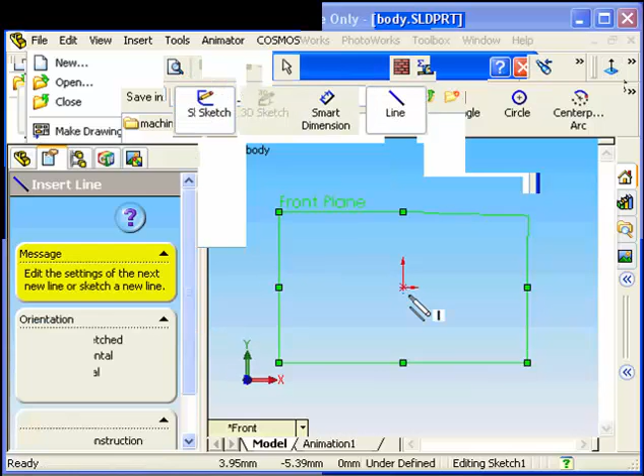Followed by that, we'll select the front plane, look normal to it, and then sketch out the profile of the shape shown on the first page of the notes.

For the 45 degree line, just come in at 45 and snap to it. Then add relations for the two lines of 45 degrees so that they're equal in length. Then add a relation to this line and this line to make them collinear so that they are in line. Hit escape to tick OK.

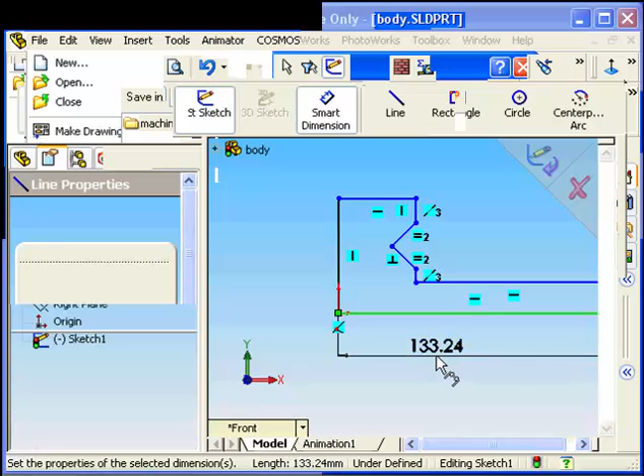Then what we'll do is smart dimension it. Don't worry if it goes out of shape, because when you dimension it, it should all fully come back into shape.

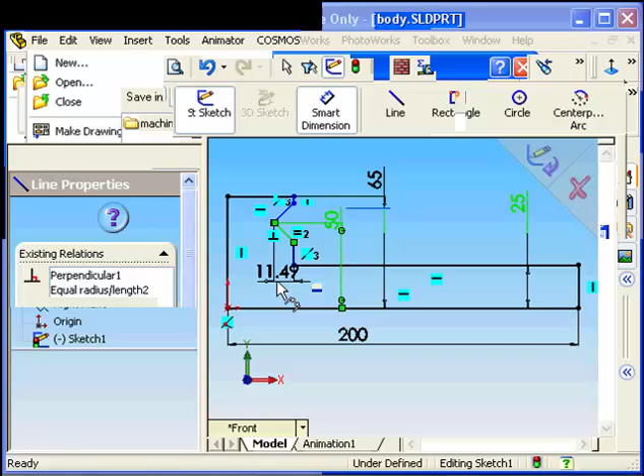If your dimensions are cluttered, you can click and drag to move them. Then Features, Extrude Boss Base, and you extrude it to 110 millimeters in a blind condition.

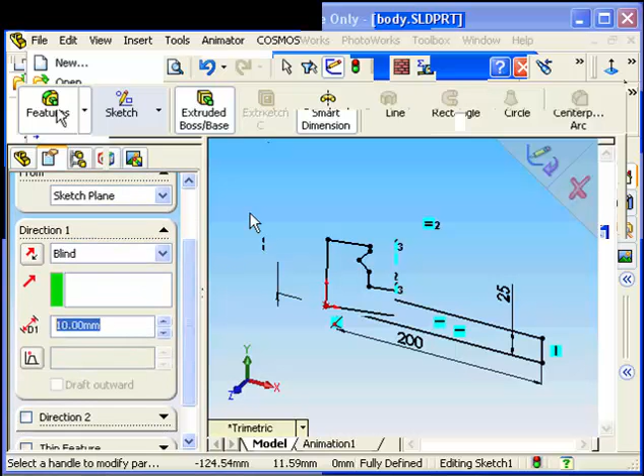Following that, select the end of the body, look normal to it, then go Sketch a center line from the midpoint to the base. To get that, just highlight the base line, and the midpoint will pop up. Click on the midpoint and draw a vertical line.

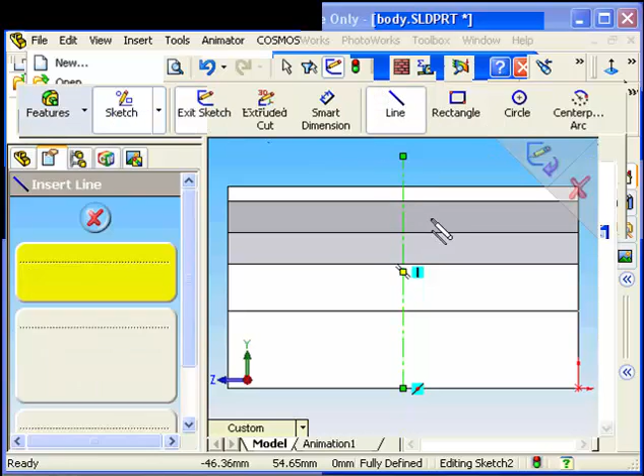Then pick the line command and draw the following profile without the curve. To put in the curve, pick Tangent Arc, click on one end, drag to the other, and there is your arc. Next step is to add a relation between the center of the arc to the center line. As we can see, they're not joined up, so what we'll do is make them coincident.

Next step, Smart Dimension. Now we can see there that it's not a tangent from here to here, so what you do is select one, hold down Control, select the other, and make it a tangent. Make sure the Smart Dimension is knocked off.

Then Features, Extrude Boss Base, and extrude it 50 millimeters in this direction.

Select the end face, look normal to it, sketch and select the point command. To get to the point, just highlight the arc there, and the center of the arc will pop up. Click on the point, then close the sketch.

Then what you'll do is go to Features and Hole Wizard. This is for tapped holes, or holes with threads in engineering terms. Here are the following types that are there: counterbore, countersink, and what we're interested in is a tapped hole. Here are the standards, so we're interested in the ISO standard. You have DIN, BSI, but we'll just pick the ISO.

Tapped hole, and in the size, including the thread, and you can see a sample of them all. The end condition will be up to next.

The options there are with cosmetic thread. So once that's done, make sure cosmetic thread is ticked. Once that's done, slide back up.

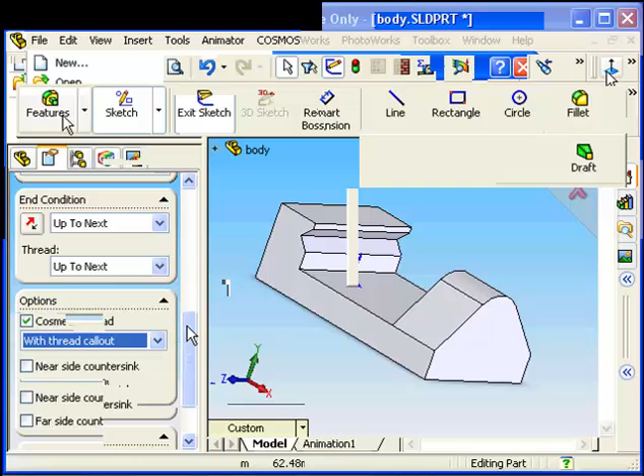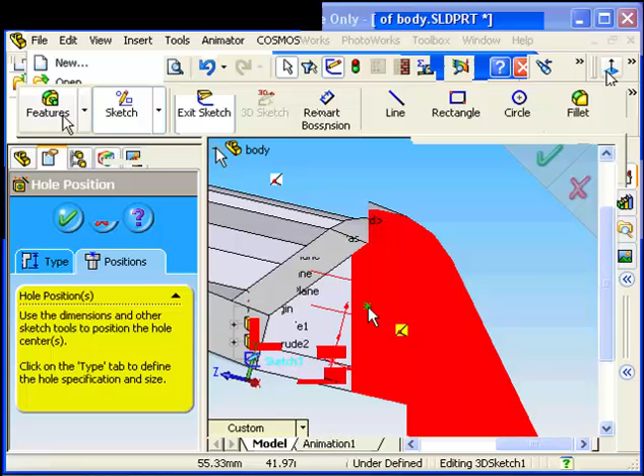We'll pick the Positions tab. This will get the position of our hole. Then what we do is come out here to the face, open up our feature tree, and we'll just highlight our sketch that we were last working on. There it is. And just in the sketch, zoom in on the sketch, and when it snaps to it, draw it. So there you have a preview of your hole.

This hole is a threaded hole, but we can't see the thread, so we'll go to Tools and scroll down to Options. It's not shown there, but it will be on yours, and the options will pop up. Then we'll pick Document Properties, followed by Detailing, and make sure shaded cosmetic threads are ticked, and leave out feature dimensions and reference dimensions, then tick OK. There's our thread showing up.

Next step then is we're going to put a raised base here for the device to float on the jaw. So we'll draw a rectangle on this surface here, smart dimension it 5 millimeters from each of the ends.

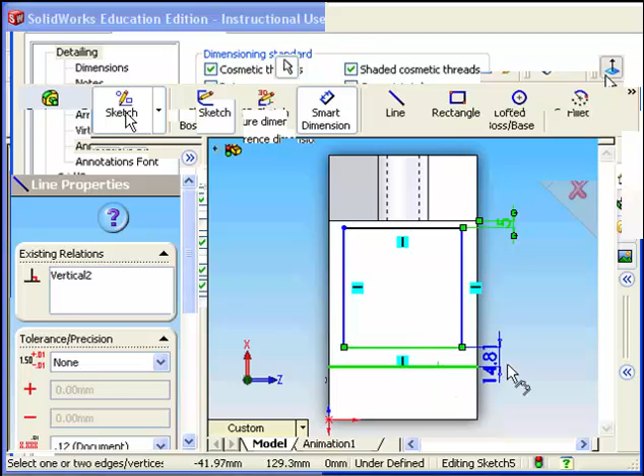And 2 millimeters from the sides.

Then it's a matter of features and extrude of the space, 2 millimeters of an extrude in a blind condition, tick OK, and there you can see it.

Our next step then is a fillet, 3 millimeters of a fillet, and we'll pick this edge here and its counterpart at the other side. It's just those two edges with a 3 millimeter fillet.

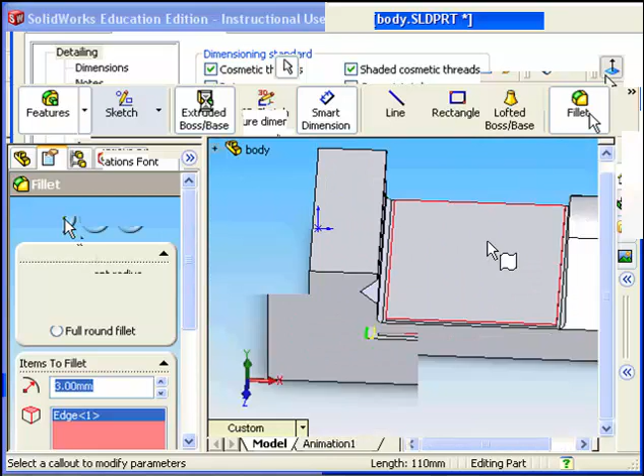Tick OK. Rotate the object around, and what we're going to do next is select the base, look normal to it. You can see the hidden detail of the cosmetic hole. Select the rectangle or the cosmetic thread. Smart dimension that rectangle to be...

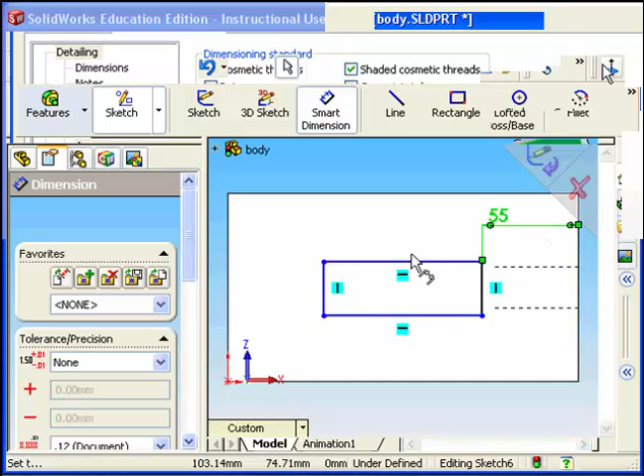55 from the end here, 45 from the other end, and 40 from each side.

Extrude Cut then, features Extrude Cut and Through All. This cuts the whole way through it, and there you have a preview. Tick OK. Our final step here is to add some fillets, 2 millimeter fillets,

and we select this edge here, here, also at the end, and we'll do the exact same at the opposite side. And tick OK.

Our final step here is to edit the material. So right click on Material, Edit Material, and what we'll pick here is just go into the steels. You can see all the different types there, copper and alloys, all the different materials. So slide back up to steel, press the plus beside it, it opens up different types of steel. So we're going to pick cast carbon, and we're going to scroll down here,

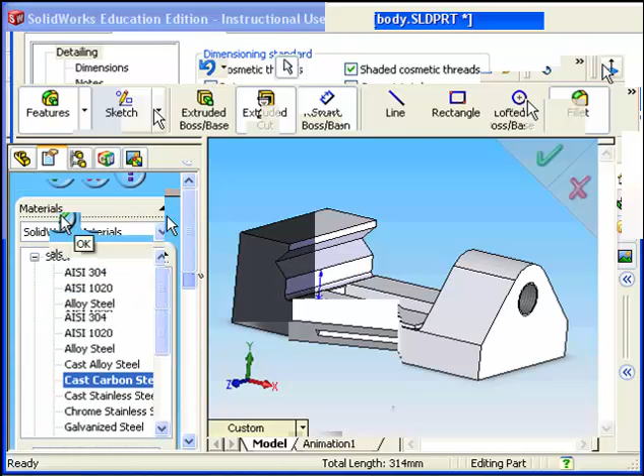and we're going to make sure that Real View is ticked, and it will show the material like it's in real life. Tick OK, and there you have it.

Then save it, and then File, New, and we'll start the next part, and OK. The next part is going to be the screw, so we'll go File, Save As, and we'll save it into our folder that we have Machine Vice, and we'll call it Screw.

First step again, pick the front plane, look normal to it, and we'll draw a little sketch above the origin. We'll join it to the origin once it's completed. So I'll draw the following rough sketch.

Select the center line then, and join from this end straight down to here.

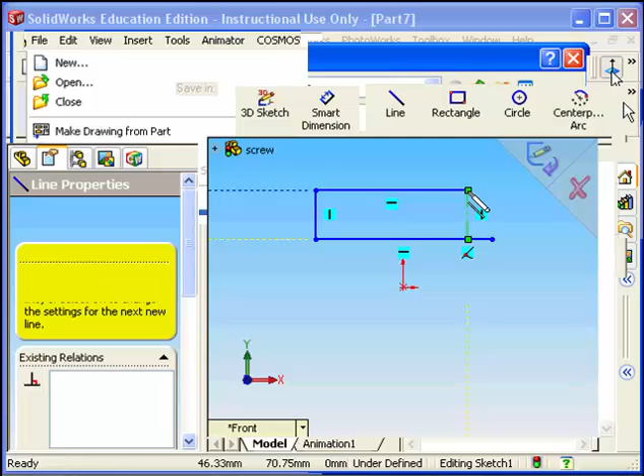And then we'll pick a 3-point arc, three-point arc, click center point arc, 3-point arc, and we'll draw from here to here. I'll just draw a rough outline of the curve.

Now you'll note that the center isn't on our line that we want, so what we'll do is we'll select the center, hold down Control and the line, and we'll add a relation to make the two of them coincident.

And then what we'll do is we'll join this point here coincident to the origin. So same thing again, select one point, hold down Control, select the other, and coincident. Don't worry if your drawing goes skewed, because we'll smart dimension it now.

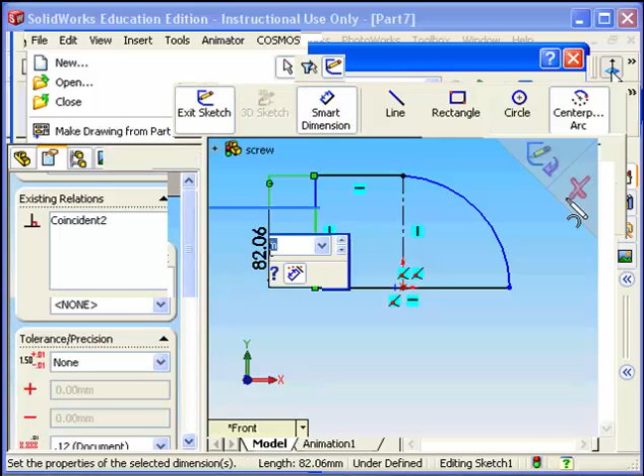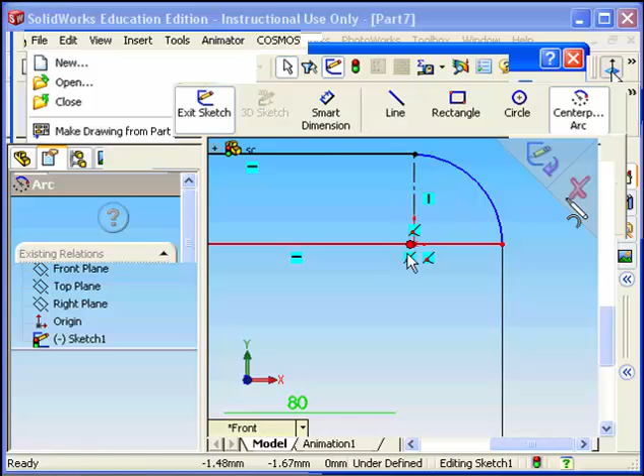And for the final one here, you can see just the center is a little bit away from the center line. I'll just zoom in on it here now. See, just there. So what we'll do is smart dimension from there to there, and we'll make it 38.

And there we have our sketch. Our next step then is to revolve that. So features, revolve boss base. Select our axis for the revolve. See, it's just there. Select the line there, and there it is revolved.

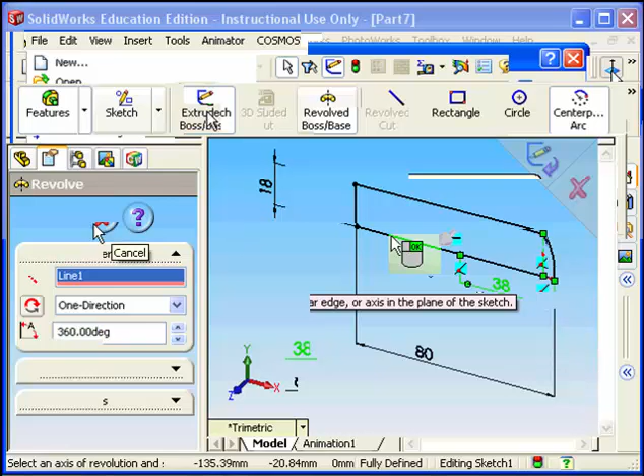Now after that, we're going to complete the rest of the sketch. So what we're going to do then is we'll select this face and we'll look normal to it. We're going to sketch a circle with the center being the origin, and we'll smart dimension that to be

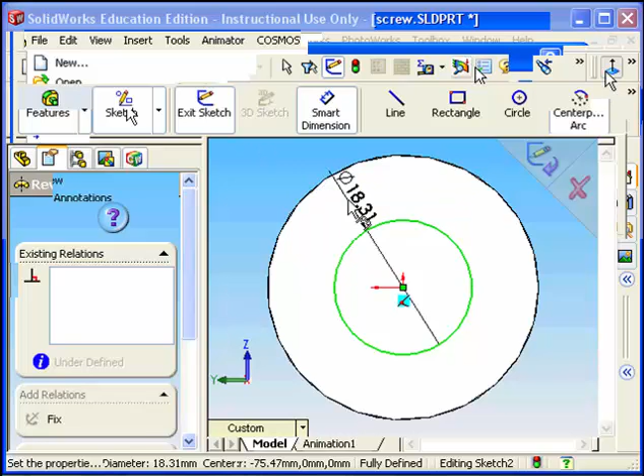18. Now once it's 18, we'll go to Features, Extrude Boss Base, and we'll just rotate it around a little bit. Make the extrude at 5, and you can see the direction of it that it's going. Once it's going in the right direction, tick OK.

Then we'll pick Sketch, or select our surface again, look normal to it, pick Sketch again, and draw another circle on top of that. This time, smart dimension it to be diameter 24.

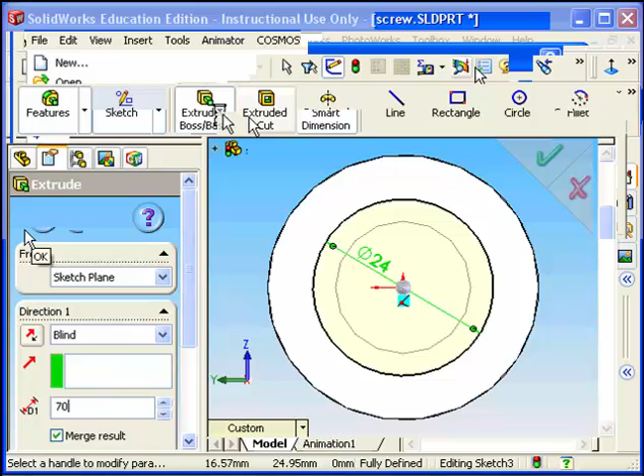And then Features, Extrude Boss Base, and we'll extrude this to be 70 millimeters. Now this is where our thread is going to be on, and there it is.

Now to put our thread on that, what we're going to go to is Insert, Annotations. It's just off my notes there, and Cosmetic Thread. You'll see a full picture of that in your notes. So it's just Insert, Annotations, and Cosmetic Thread.

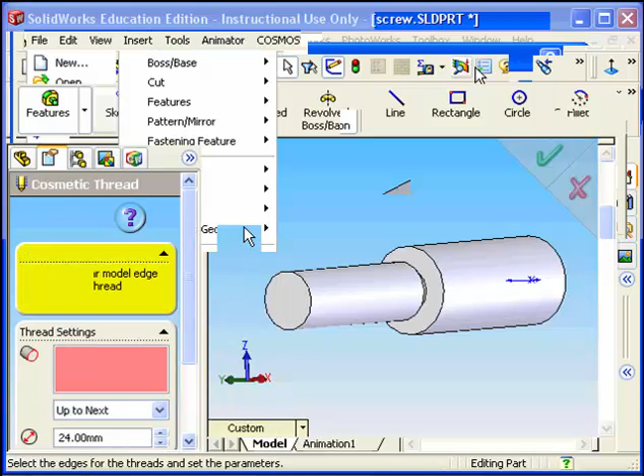You'll see here it's asking for the surface for the thread there, and it's just then asking for the diameter of the thread and the position of it. So I'll just up this to 18 here, 18.8, and tick OK.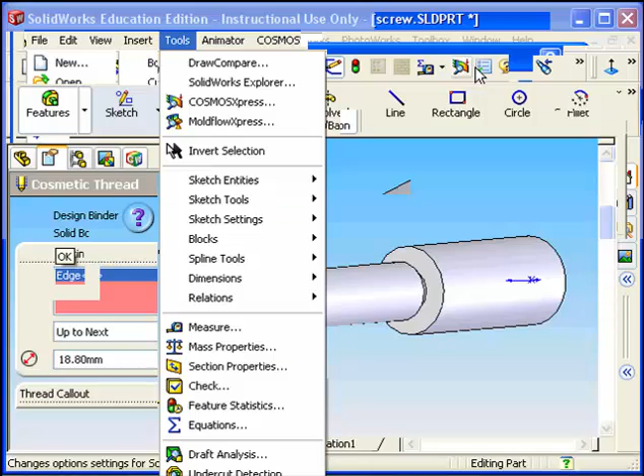Now it's the same thing again, it's not showing up the thread, so what we'll go to is Tools, Options, and the same as the Hole Wizard, Document Properties, Annotations Display, and make sure that Shaded Cosmetic Threads is ticked. Once that's ticked, click OK down on it, and there your thread should show up for you.

Following that, we select the end surface here and look normal to it again. We're going to then sketch another circle of diameter 18.

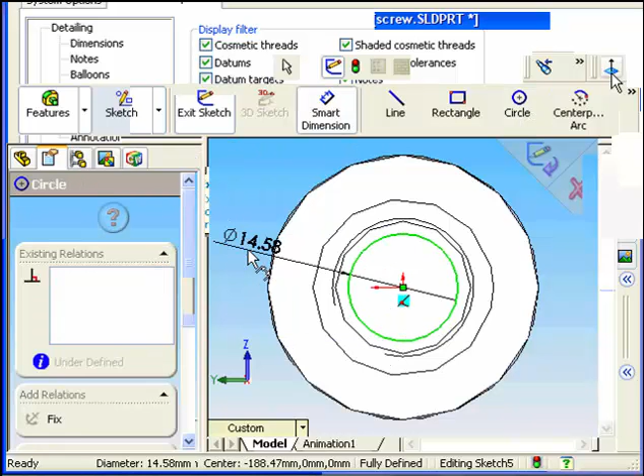Following that, we're going to extrude that to be 38 millimeters, with the center of the circle again being the origin, since they're all concentric. For the outside surface, there's a couple of bits and pieces similar here to be done. We'll look normal to it, draw a circle of diameter 16, and extrude that 5 millimeters away.

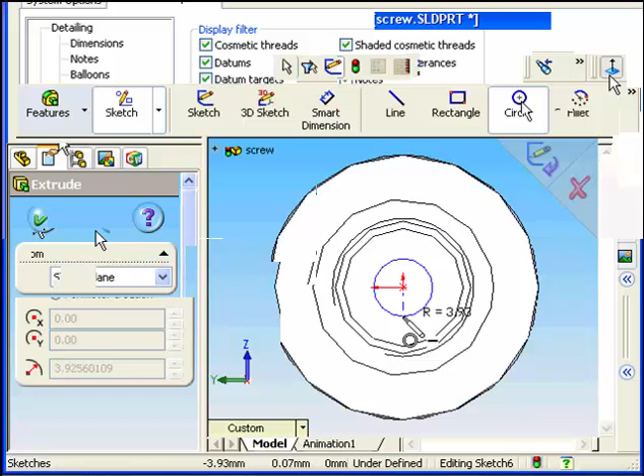Next section is to select the front surface again, draw another circle there to be 12 millimeters in diameter. We'll then extrude that for a distance of 20, so features, extrude boss base, and 20.

Following that, same thing again, but this time we're going to put in a circle on this surface here, on the center of it, of diameter 6. Now it's a good idea after the sketch is drawn to rotate it around so you see what's happening in 3D. Features, extrude boss base, and we'll make it 6, then rotate it around to make sure.

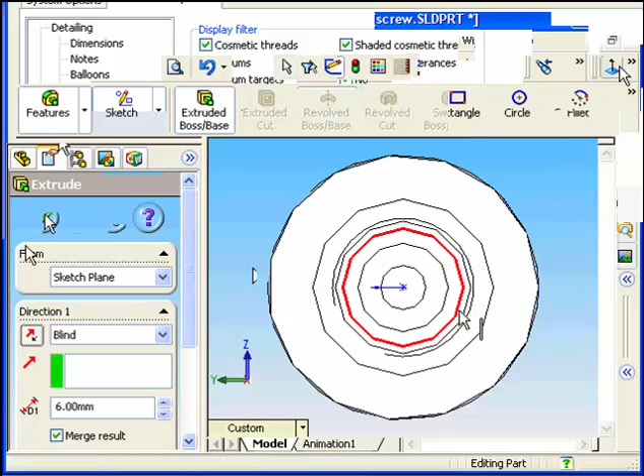Then select the surface again, same thing again, and this time a circle of 12. Now it should snap onto the circle from before to give you 12, and then features and extrude that for 4 millimeters.

Following that, it's a fillet just to fill in the section, the 6 millimeter section down here. So fillet and a 3 millimeter fillet, here and the opposite side there. That's just for the pin to go in, to lock it.

Once that's in there, we'll change the material, so right click on material. If you notice here, the cast carbon steel will be popped up because we used it last, so we'll pick it again there. And there we have the material done.

Now what we have to do finally is go to texture on here. So if you select the surface, right click, face and appearance. I'm just going to rotate it around this way for you to see it better. Face, appearance and texture, and then you can scroll down and pick the textures for metal.

It will be machined metal, and it will be knurl 1, knurl 2, so you can just pick the one you want. Don't worry if it looks too big or too small, because you can change the size of them. So we'll pick knurl 1, slide down the slider bar here - this is the angle, this is the zoom on it, so you can see it gets larger and smaller as you slide it. Slide it to the position you're happy with, then tick OK.

Final step then is to save it, and then we're ready to draw the locating pin. So to draw the locating pin, File, New, Part and OK.

Then what we'll do is File, Save As, and we'll call this locating pin, into the same folder as before. You can already see the parts that have been saved, and the parts above with the dollar sign are parts that are open or that you are working on.

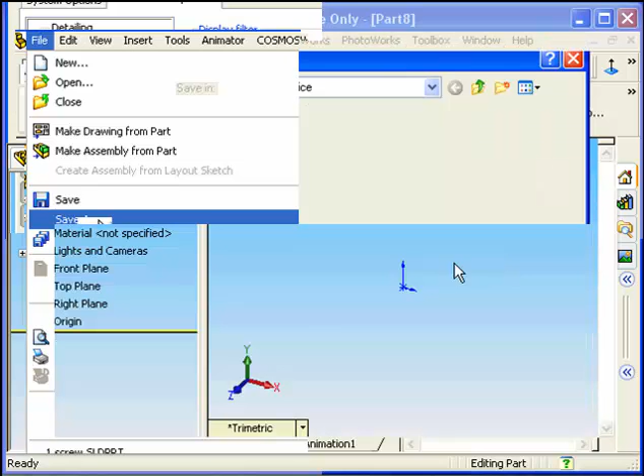So save that. Then we'll pick the right plane, look normal to it, pick a circle, and on the origin we'll draw a circle of diameter 10. We'll extrude that 3 millimeters out this way.

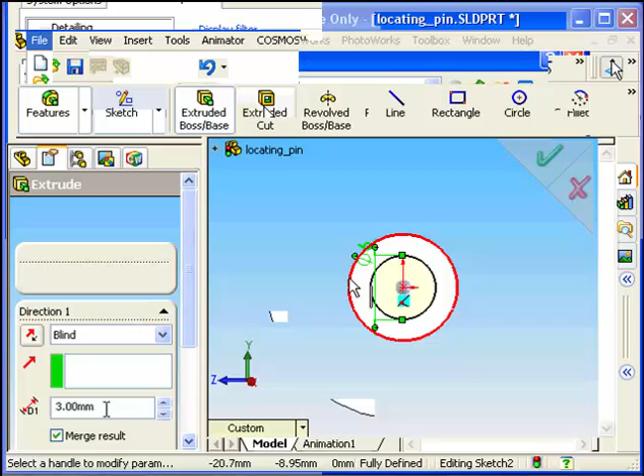Followed by that, we select this surface here, look normal to it, and sketch another circle of diameter 6. Then it's features, extrude boss base, and we extrude it 33 millimeters out this way. That's our locating pin done.

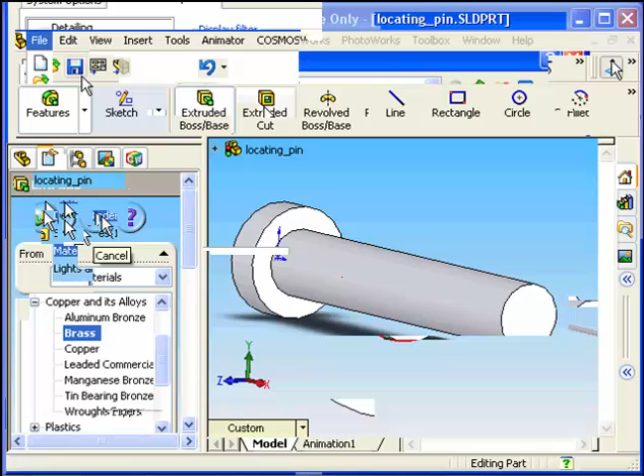All we have to do is edit the material. So right click on material, edit material, and it's going to be brass. We'll pick copper and its alloys, and there's brass, select it, tick OK, and then save it. And there is your locating pin saved.

Our next step is file new part again, and we'll do the movable jaw. So save as, and we'll call this Movable Jaw.

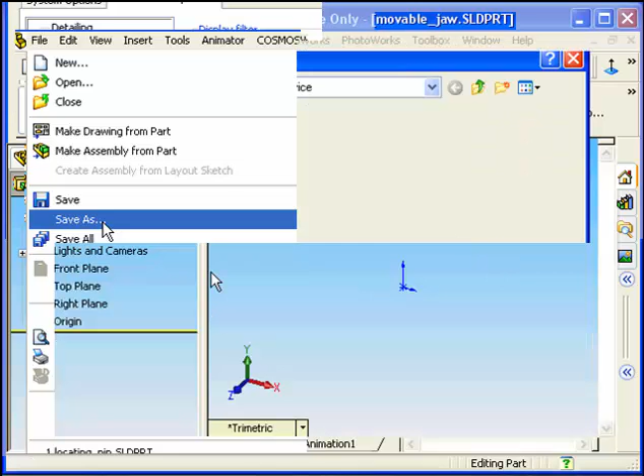Note that all these pieces you are drawing are saved as parts. Now once that's done, we'll pick the front plane, look normal to it, and draw the following sketch.

Using the line command, and for the 45 degrees it snaps into 45, and there we have it.

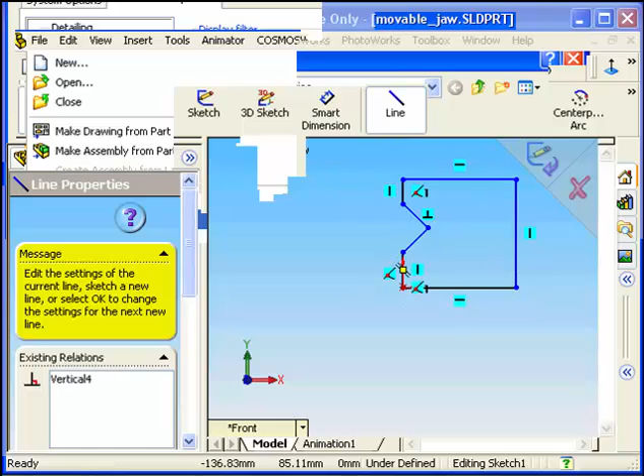Now what we'll do then is we'll add some relations. So we'll select this line here, hold down Control, select the other, and we'll make the two of them equal in length, so that makes that perpendicular there, and we'll make this line and this line collinear.

Followed by that, what we'll do then is we'll smart dimension it, and we'll make this side over here to be 38. Don't worry if your sketch goes skewed, the base here is going to be 35, so it should help to drag it all back in.

Then, to drag our sketch, all you need to do is click on any of the lines when it's not in Smart Dimension, so just knock off the Smart Dimension. Just click on any of the points and you can see you can move them about.

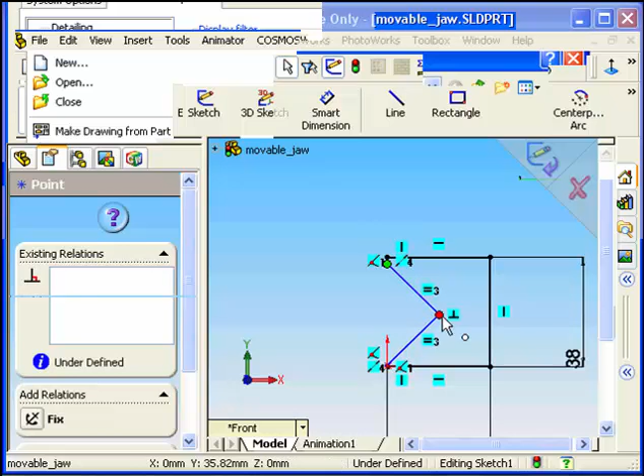Then what we'll do is Smart Dimension the rest of it. So we'll make this dimension here to be 15.

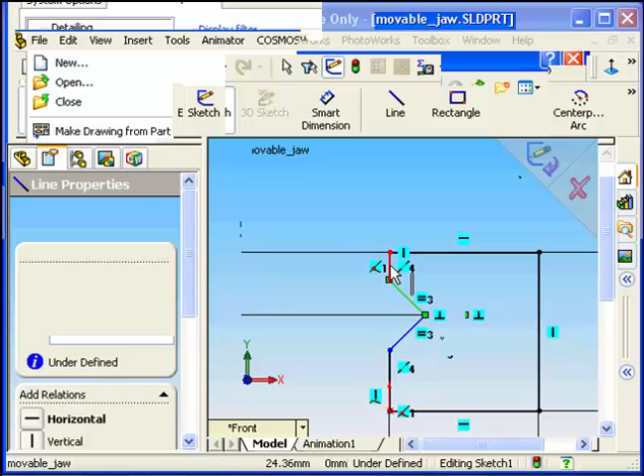And then knock off our smart dimension, and what we'll do is we'll just drag it in there at the corner of the right angle, and that helps the V to squeeze in. So we make this side here to be 3, and there is our sketch fully defined.

Following that, we'll extrude that to a distance of 100 on the movable jaw and tick OK. That's in a blind condition.

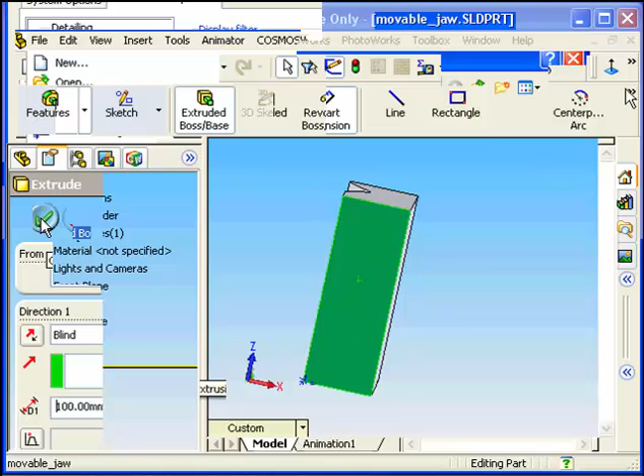Next step then is select the base and we'll look normal to it. Now what I'm going to do here is I'm going to turn on hidden lines visible, so you see it there, and that's the line of the V. This is so that I just know the right side I'm drawing on, and we'll draw a rectangle there.

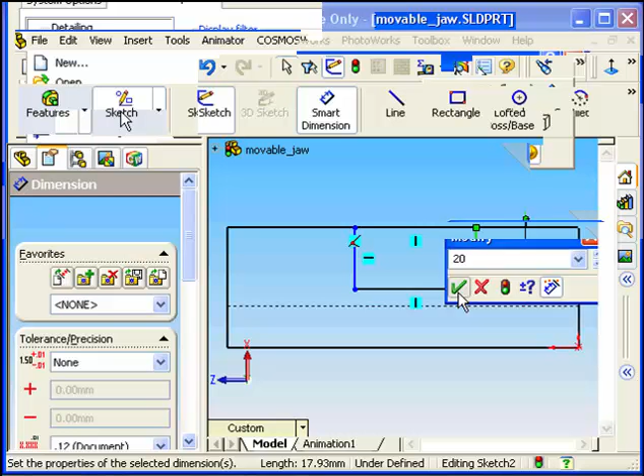I want the rectangle at the back of the jaw. Smart dimension it to be 20, and we want it 35 away from each jaw.

Then features and extrude boss base, and we extrude that to be 20 millimeters and tick OK. Now I'll just knock that hidden lines visible off, and we see a solid object.

You can see now that it's at the back, and we want it at that side. Select that face there, look normal to it, and then what we're going to do is we're going to sketch some center lines on it.

These center lines are going to help to line up the hole for the screw to go into. So the first center line will be coming down from here, and you'll see it will snap onto the edge of the jaw, which isn't exactly at the midpoint. So once it snaps on there, draw the center line horizontally.

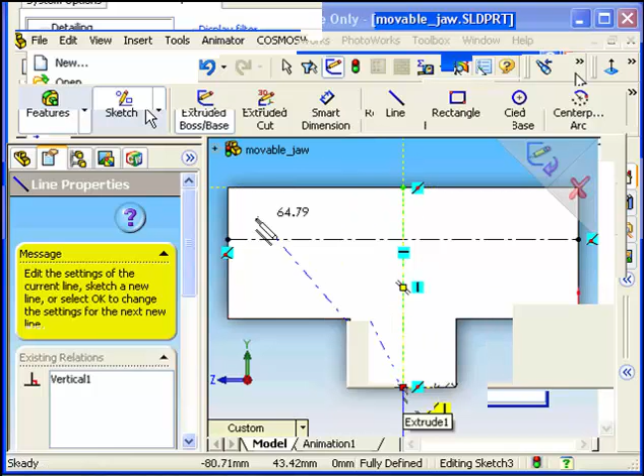Following that, select another center line, and we'll just draw from the midpoint down here. Now, where them two lines intersect is where we're going to draw our circle, and we're going to drill the hole for the screw to fit in.

So we'll draw a circle first, and we'll smart dimension it to be diameter 24.

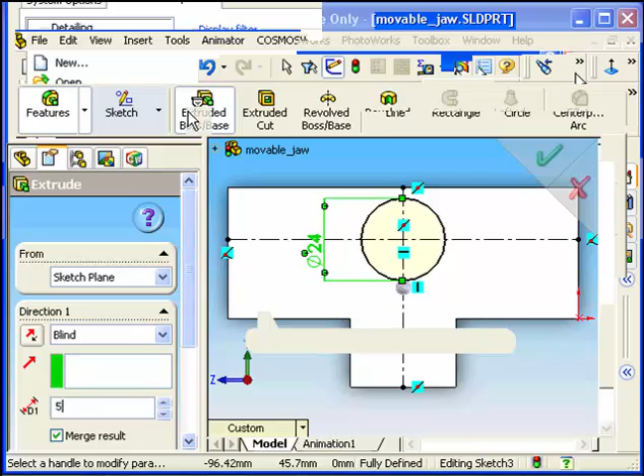After that, we'll go features, extrude boss base, and we'll extrude this out 5mm from the surface. We'll get a little disc like that.

Then we select the outer surface of that there, and we look normal to it. Sketch another circle on that, and this time we can't see the origin, so just leave your mouse over the edge of the existing circle, it highlights the center there, and you can draw another circle then.

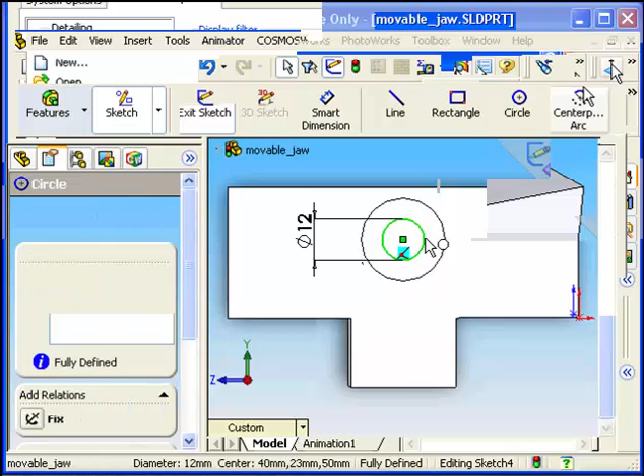So this time we're going to draw a circle of diameter 12, and with that what we're going to do then is we're going to go features, or we'll just make the two circles concentric.

Select one, hold down control, select the other circle, and then select concentric. Then features, extrude cut, and we're going to cut into this 25mm. So we just drill the hole in there, 25mm, counterbore it in.

Then we'll look normal to this surface here on the top, and we'll sketch two center lines. First center line is going to be through the center, going across this way from midpoint to the other.

And the second one, just knock it off and knock it back on then to draw the other one. It's just going to be off center here for the pin to fit down between the fillet on the filleted surface on the screw. So it's going to be 44mm away from the edge.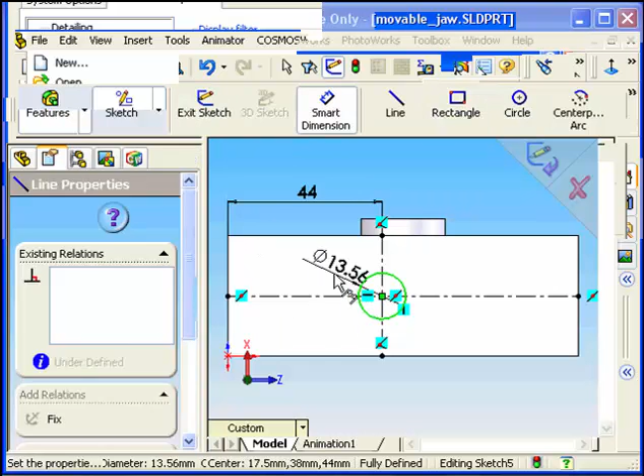And then circle, draw a circle here, smart dimension it to be 6mm, and then it's features and extruded cut of 36mm, and tick OK, and it has a hole drilled down there, 36mm for the locating pin to fit in.

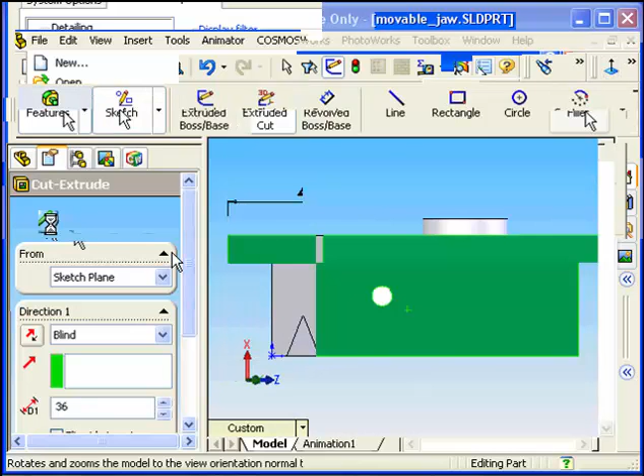Now what we have to do is we have to look normal to that surface there again and sketch another circle. This time what I can do is see the center pops up again. This time the diameter is going to be 10 on this circle.

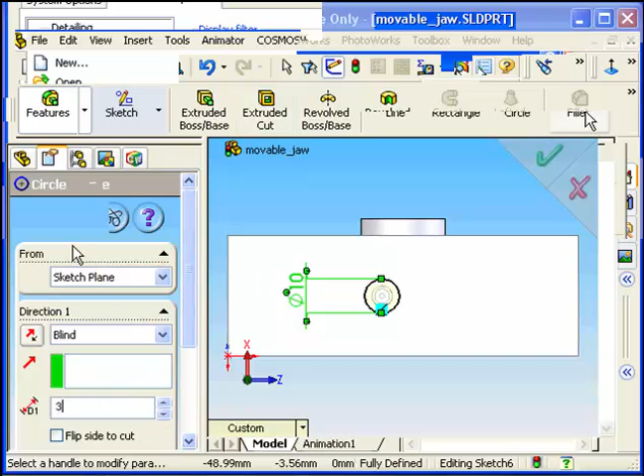And we're going to go an extrude cut down 3, remembering that the locating pin had a surface for it to fit down flush. Now once that's taken out, it's just a matter of editing the material. Right click on edit material, pick cast carbon since it was last used, and there it is, the movable jaw done.

Save the movable jaw, and then what we'll do is we will go to File, New, and we'll pick Assembly this time, and OK.

The first thing inside in this assembly it's asking us is to insert a component. Now the first component that we're going to put in here is going to be the body, so we'll just select the body. Now you can't save until a part has been put in, so that's why I just checked up there. Pick the body, drop it in.

Then what we'll do is we'll go File, Save As, and this time we'll call it Machine Vice. Now if you note it says Save As Type, the type of file it's going to save as is an assembly file. So we're just going to save it as Machine Vice, and you see Assembly, and Save.

Next thing that we're going to do is we're going to insert all our components. So Insert Component, and this time we'll pick Screw, and just drop it away from the object. And there is our screw put in.

Now what we'll do next is we'll insert the rest of the components, the same method again, making sure that they are not joined up with other components. So insert component, pick locating pin, and just drop them away from the object, because if they touch, it automatically makes mating very, very hard. So same thing again, just come in and drop.

Now we must rotate some components, i.e. the locating pin, just so that we get it in position. Just click rotate, click on the item you want to rotate, and just hold left click down and you can move it to roughly position and tick OK.

Now we're ready to mate, so we're going to go to mate, we'll select the screw surface on the screw, and we'll select the screw thread inside in the body, and we'll make them to be concentric, and that means that the two of them are concentric to each other, so that means they will move along there.

Next thing that we're going to mate is the movable jaw to the screw. So we'll pick that surface there, and we'll rotate it around, and we'll pick the same surface that it's in contact with on the movable jaw. So we're just looking in here at the end. You can see there it is, the surface, and we'll make them to be coincident.

Next thing is we have to make that to be concentric. We'll just select the circular surface here, and we'll select the circular surface inside here on the movable jaw, and we'll make the two of them concentric. So they're coincident at the end and they're concentric there. Hit F, and you can see the two of them are joined up, and you can see there that the screw twists when the movable jaw twists.

Next thing is to put in the locating pin. So mate, just remove that from there, so just click on it and delete. Pick the cylindrical surface of the locating pin and pick where it has to go into, and you can make the two of them concentric.

Final step then is to put this in flush. So what you can do is, I'm going to pick the underside surface here of the locating pin, and I'm going to pick the surface down there and make them coincident. Now it can move along, but the jaw can still twist.

And I'm going to make that to that side, and I'm going to make the two of them to be parallel. So that means then that that surface and this surface cannot twist anymore, they have to be parallel. So there is our jaw, and it's running through our vise.

That's the mating done. Our final thing is we're just going to look at some collision, stopping it at a collision. So we go to move component, and we just tick the box for collision detection, and all components, and we tick drag part only, and you can just move it and it'll stop there. Stop at collision and drag part, and you just move it.